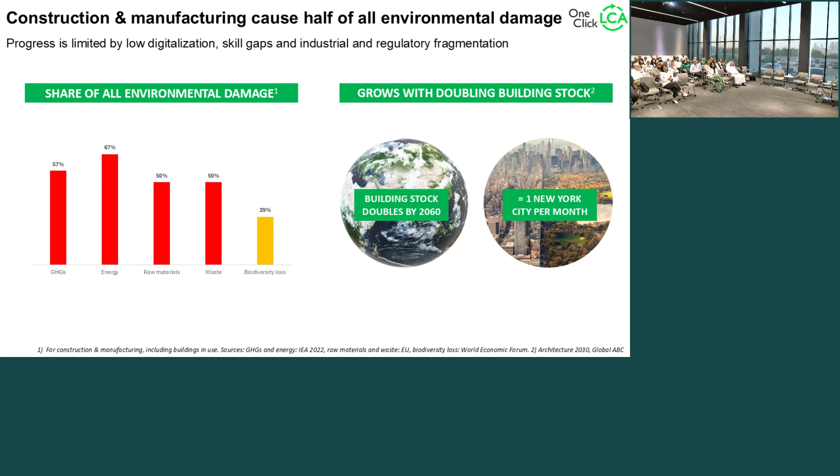One last slide. So far we are now in the era of carbon management, and that's the most crucial part of it, because we have been working quite extensively on the energy side, decarbonizing the grid. A part of it has always also been implementing reduction in embodied carbon, decarbonization, and so on. But now it's going to be the full picture as a whole moving forward, and this is what we need to really start adapting faster and in a more scalable way.

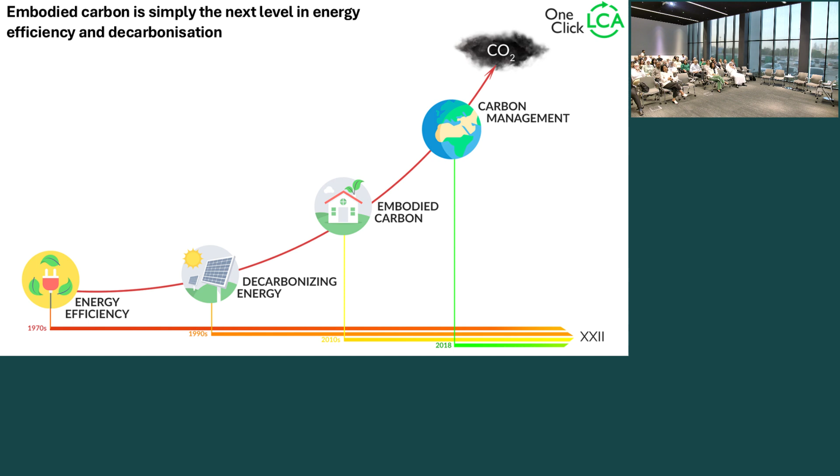So just to give a bit of background on LCA, how does that come into the picture? LCA is basically a quantitative method of assessing environmental impacts, both operational, so energy related, as well as those which are embodied, so those that come from materials. These impacts are associated with the life cycle stages, either of a building, a process, or a product. ISO is the most common basis of life cycle assessment all over the world, those are the basic standards followed.

Moving forward, you then have the EN standards, which are adapted to construction, buildings, and some to products. Some of you may have also heard of environmental product declarations, which are more further attuned to the products themselves. And then moving down the level is the national regulations or the voluntary certifications that come into the picture.

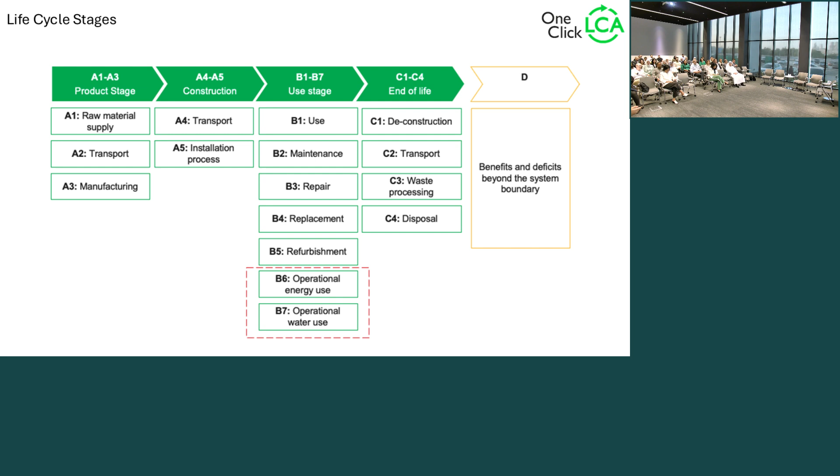So you have all the different stages covered, as you can see in the product stage on top, the construction, use, end of life, and energy is just one part of it. That is what the entire life cycle assessment is about. As I mentioned before, embodied carbon forms a part of that life cycle assessment.

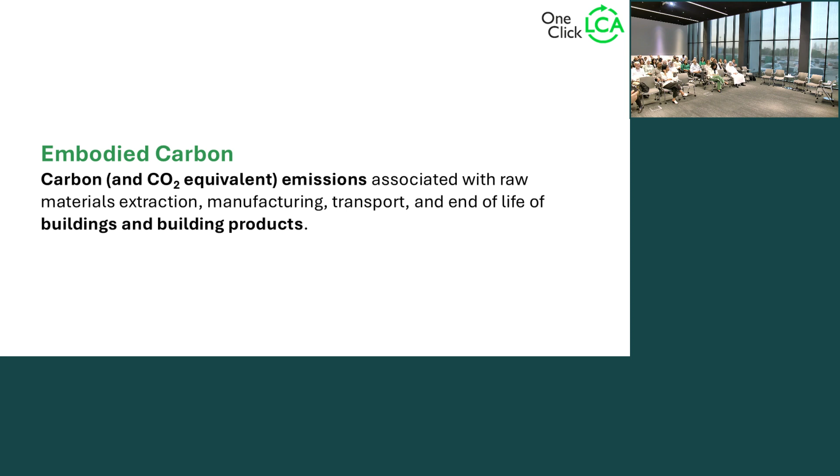This is something I thought I'll just add in here. I'm sure all of you are still aware of it, but I just thought I'll put it into perspective because these terms are used quite interchangeably, and more often so this has been the case. If you want to go again into where embodied carbon comes from, which is one of the main things I will also look at, it would be all these stages again, as we saw before.

So if you sum it up as a full picture now, you can see that for understanding the environmental impact of a building, what is most important is, of course, your quantity of materials, your bill of materials as it's referred to, and then the environmental impact of each material, each process, which is what would make up the total environmental impact of a building. That's how you would basically look at it in very simple terms.

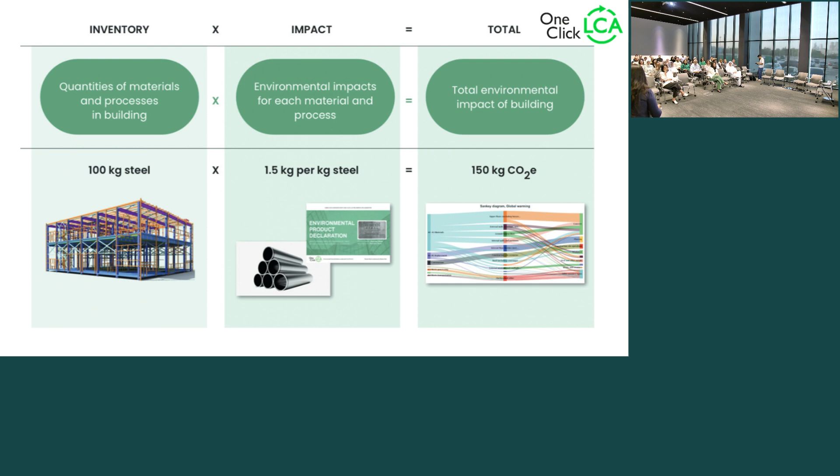So we've covered all the LCA aspects of it, but what exactly are the applications of LCA? We really need to understand what LCA would be used for in construction. It's quite widely used and it's becoming more and more mandatory moving forward. As you probably already know, certification schemes are one of the primary drivers of LCA. However, a lot of companies are also now moving towards making design choices based on an initial LCA done, or an initial assessment done. This also helps to communicate transparency and understanding.

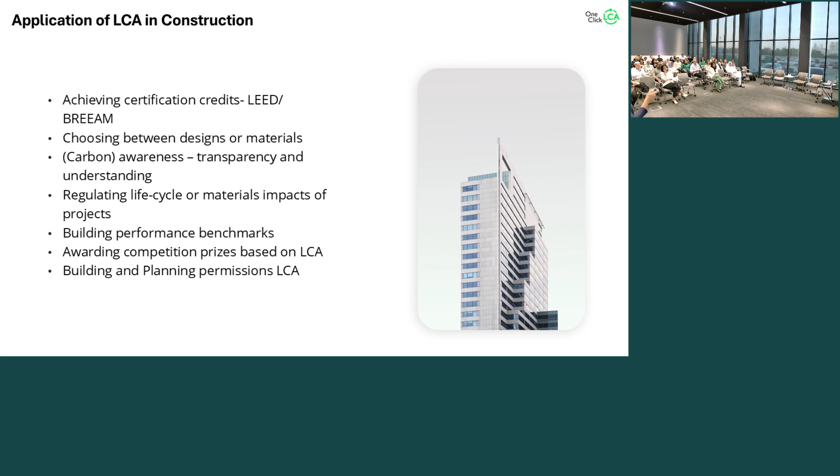And the different parts of regulation of the life cycle or the material impacts, building performance, and other things, I'll try to give a few examples of each as much as I can. But I don't want to cover a lot because this is also something the next speaker will speak about. So a very simple slide that encompasses where LCA is used and being adopted widely.

Not surprisingly, in regulations moving forward, quite more often, to give you a global perspective, EU, USA, and recently also South Africa for certain products, have made it mandatory to do an LCA. Then again, not surprisingly, one of the drivers is certification schemes. And the last one, which is increasing highly moving on, would be buyer requirements. This is something that is going to be asked more and more in tenders, and in any kind of request for proposals that you would face moving forward.

So it's essentially important to just understand what it is. A short example again, you can see the difference in the different regions of certification, regulation, and standards.

This is something we've also published in a document we put out called the Embodied Carbon Review. It's available online if you want to go look at it. But as you can see, international standards are one of the most important drivers, as well as certification-driven factors.

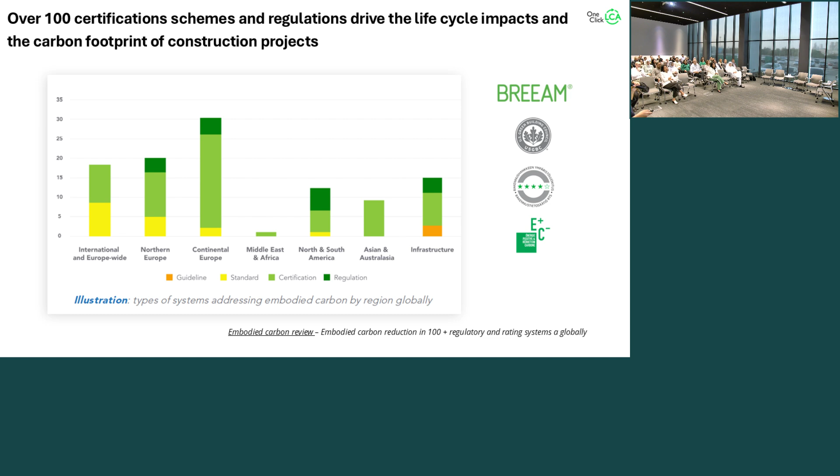Some examples of that, of how companies have been using certifications as a means of getting LCAs from around the world, how they use it, as you can see over here.

So how to use an LCA? It's quite simple, really. Basically, understanding it, assessing it, what you need to do, comparing it, and optimizing it in order to find hotspots and reduction opportunities. That's if I have to really simplify the whole essence of LCA and the need for it to be done.

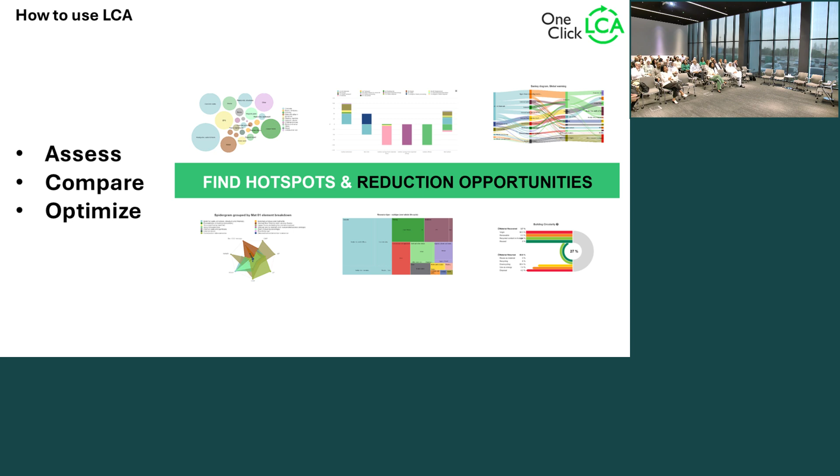One example I'll give over here would be how building typology actually impacts carbon. This is also from a real life project case. So you can see type, shape, and size are quite essential, and they impact quite a lot the choice of materials, the carbon driver, what type of materials you choose, what you're going to do with that requirement, and how much the carbon impact would be as a whole.

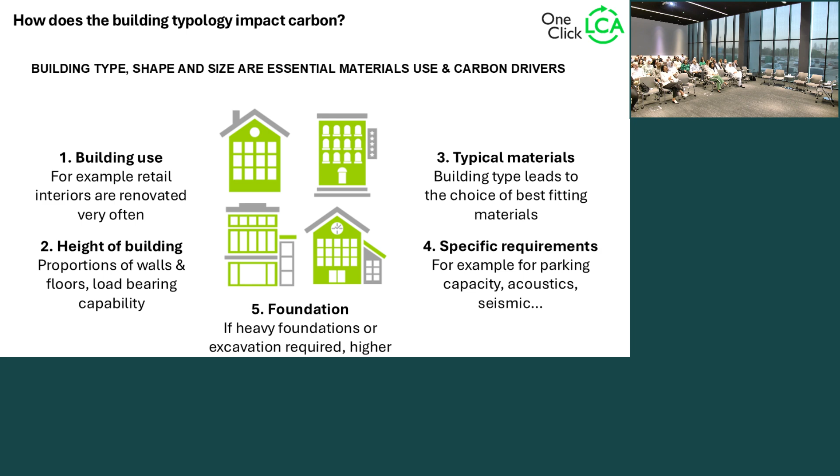So one small example of how it works. And then if you actually look at it more on a visual scale, you can see the per meter square of embodied carbon varies between the different types of buildings I just showed you.

So the construction materials will cause the highest amount of embodied carbon moving forward, for educational buildings, and then successively for others that you see over here. So it's really important how you build, with what you build, and the choices that you make, really, assuming that you have a uniform renovation cycles.

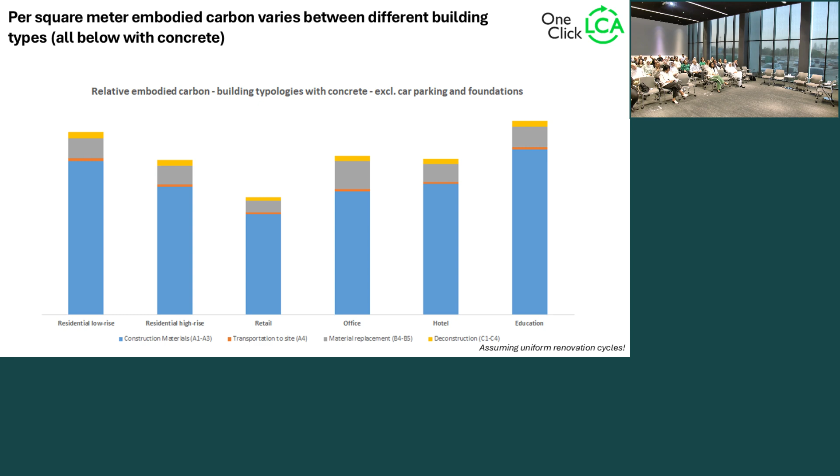Another one of the life cycle impacts and choices is for refurbishments. So here, for example, you can actually see when you have built a building, of course steel and concrete are going to play the biggest role. But when you do have refurbishments at certain timescales, you can also see how much building systems are going to impact that more, on top of steel and concrete moving forward. So this is something you can actually use the software for in order to make these comparisons.

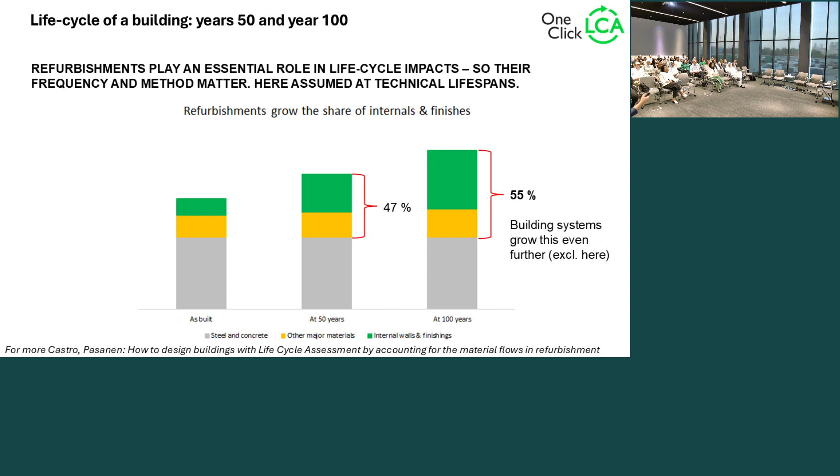Last but not least, one of the other things you can also think of in terms of LCA is putting it even beyond design. So making EPD specifications for lower carbon materials and products. That's one of the main things being asked for more and more, that most likely all manufacturers right now across GCC or even Europe or other countries are being required to submit. Assessing your designs, sharing different benchmarking databases.

One of the ones I can also mention over here is Schneider Electric, which has provided us with their huge list of data in order to make it available for every other user of the software. And of course, to share the low impact design strategies. One example of projects making it mandatory for manufacturers to submit the carbon reduction or the transparency of a product in the form of an EPD.

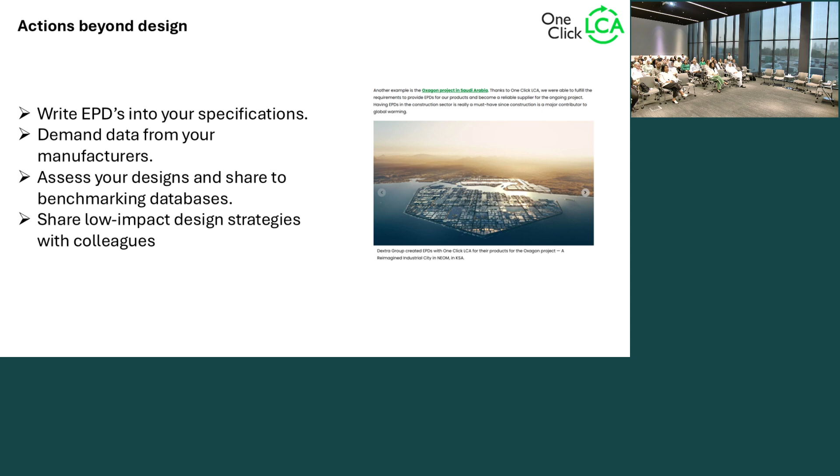So I'll just summarize it quite shortly with what OneClick LCA is. We provide an LCA software for the construction and manufacturing sector. We work quite extensively in the buildings, infrastructure, and manufacturing segment as a whole.

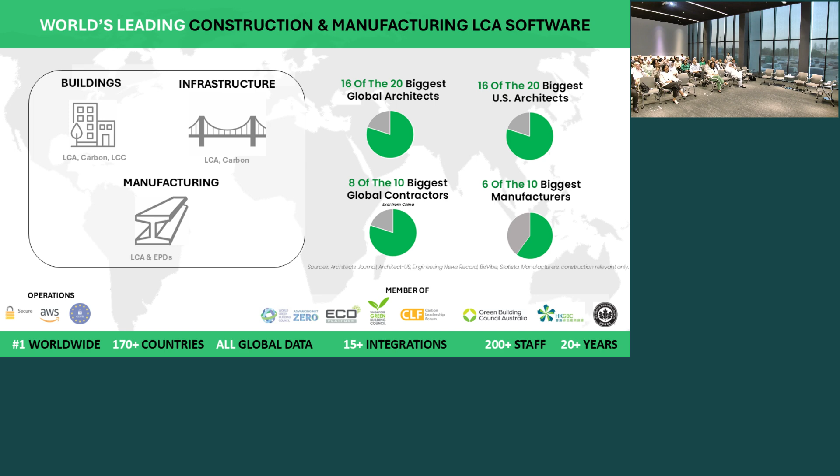We are members of different green building councils, working quite strongly with them to help raise awareness on life cycle assessment, whether it's on a building, infrastructure, or a project. What would be useful for the construction industry is to work with the software from pre-design to as-built phase, because this has the maximum impact, that you can actually drive LCA adoption within the company itself.

Compliancy, of course, is one of them, and the second would be the global database, so you have access to these databases in order to help do this assessment. It wasn't probably possible so much 6 or 7 years back, but now it is.

And as I mentioned, you can use the software from strategy to construction, even to refurbishment, as well as to reporting. So it's not just a means of reporting, it's a means of also understanding what you can do from the beginning.

One important aspect that might be useful along with the building design is looking at climate resiliency in the form of a microclimate solution. ENVI-met is one such tool that can help understand the impact the climate will have on humans, livestock, plants, nature, everything around us, as well as help understand how we can reduce these heat islands that are being created due to so much construction going on.

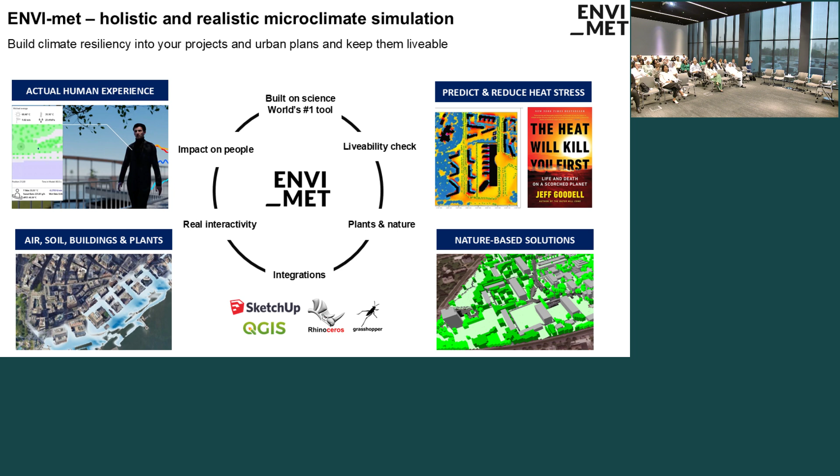Last but not the least, how you can get your data. It's not required that you manually fill in everything. It's quite simple to use, very easy to send the data from any tool that you use, even if it's simply an Excel file, to OneClick LCA in order to generate your calculation results.

Data, tools, compliance at your disposal, whichever one you may need, whether it's LEED v5, which is currently released, or the older versions, doesn't really matter. Some of the companies that have also been using it quite extensively in the GCC, for example, Khatib & Alami, Turner. You can also look at these few companies that are in the GCC area.

So yeah, that's it from me, and that's a bit about life cycle assessment and its role.

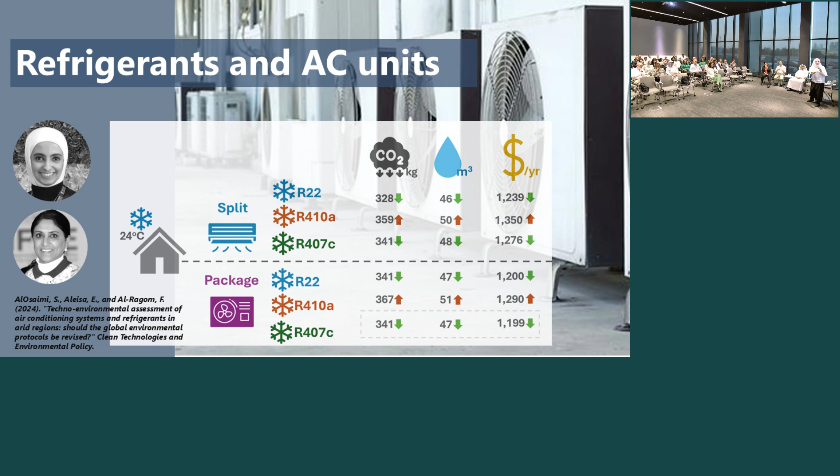We have worked together on AC systems and refrigerants, and by investigating the life cycle assessments, going through the entire life cycle, this research has been published. We were challenging the protocols.

We found that the Montreal and Kyoto protocols would focus on the production rather than the use phase. And actually, they were focusing on ozone depletion, which has a very smaller impact on the normalized scale when it comes to global warming. So we were challenging the international protocols while using LCA, and we found that the substance that's legal or authorized to be used in Kuwait is actually the worst when it comes to global warming.

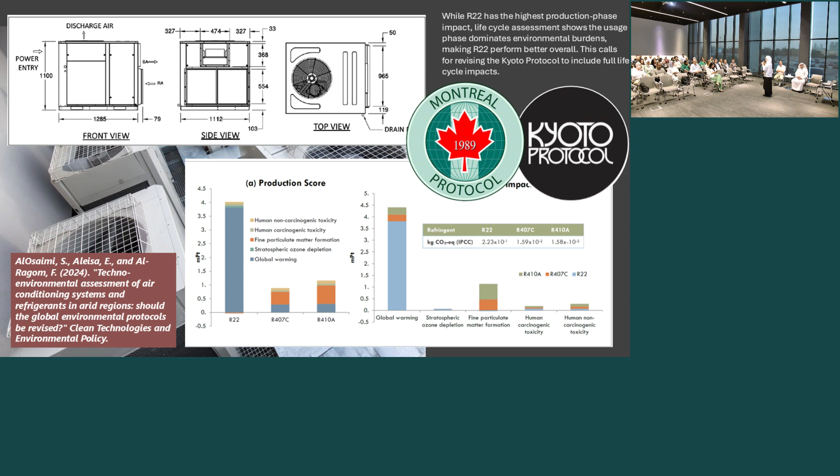And the adverse impact on ozone depletion is not that big.

This is another project that was also published last week, done by a group of undergrads. They were investigating the use of solar panels on Sabah Al-Ahmad City, and they investigated the entire life cycle, even measuring the cable length, the inverters, and everything needed. They found some difficulties related to something called the duck curve, where problems could arise when the electricity is on grid, and they suggested solutions for that. They also calculated losses.

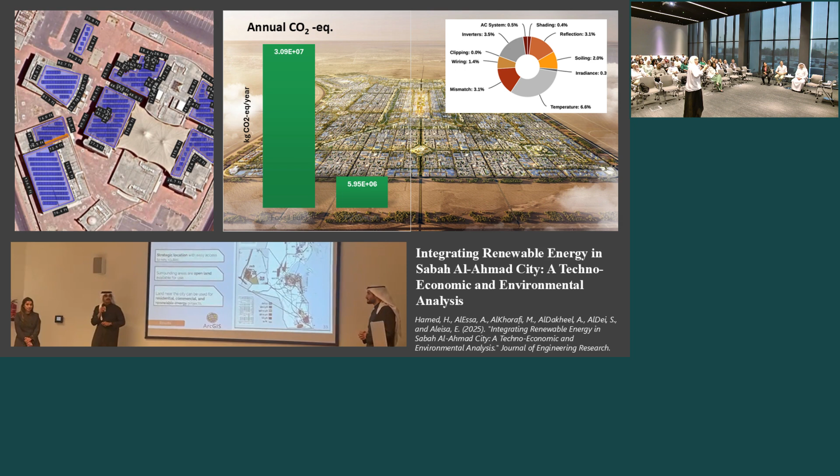This project is interesting. This is Rawan al-Sammar, a master's student who has graduated. Rawan has a family business of building fiberglass prefabricated modular structures, and she was interested in investigating the life cycle of it, especially since we use it a lot in the oil sector and in construction. Unfortunately, we found that it's not that good for the environment. So they built an entire bill of material model, and then investigated throughout the life cycle of the building.

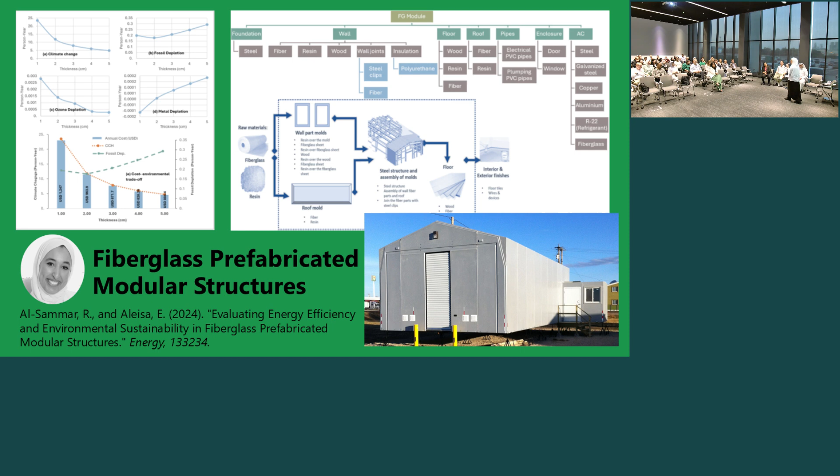Moving to the transportation sector, this is Dalal Ramadan, also a student of ours who joined MIT and graduated with honors. Dalal was interested in investigating the LCA of electrical vehicles. She found some challenges when it comes to the social aspects of LCA, in the batteries, and the heat that comes from the streets and its impacts. Her research is also published, you can check it over there.

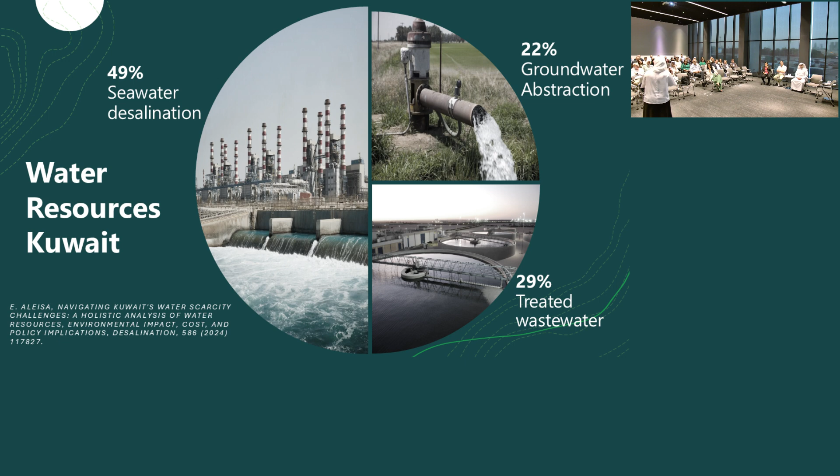Water resources is a major part of our lab. We have worked tremendously on desalination and power cogeneration, the LCA of it. We have also worked on treated wastewater, and currently my student here is going to work, inshallah, on groundwater resources in Kuwait. We use these outcomes in UNESCO annual water reports, submitting data to UNESCO from the LCA reports we create in the lab. So we have Dr. Khawla Alshayji who works with us a lot. We have published many journal papers on cogeneration, and investigated the impact of the energy mix

and the trade-offs when we switch from natural gas to crude oils, regarding efficiency and type of pollutants. This is Sarah Al-Haddad, who works at KISR, at the wastewater center. Together we published a paper comparing types of seawater desalination with types of wastewater treatment. An interesting finding was that although Kuwait is promoting RO, we found that RO wastewater needs water to produce water. So every cubic meter of water we need to clean with RO from wastewater, we would use almost double the amount. We need water to clean water, which is a problem. So we were advocating actually using tertiary wastewater to increase this amount, because the water footprint is much less.

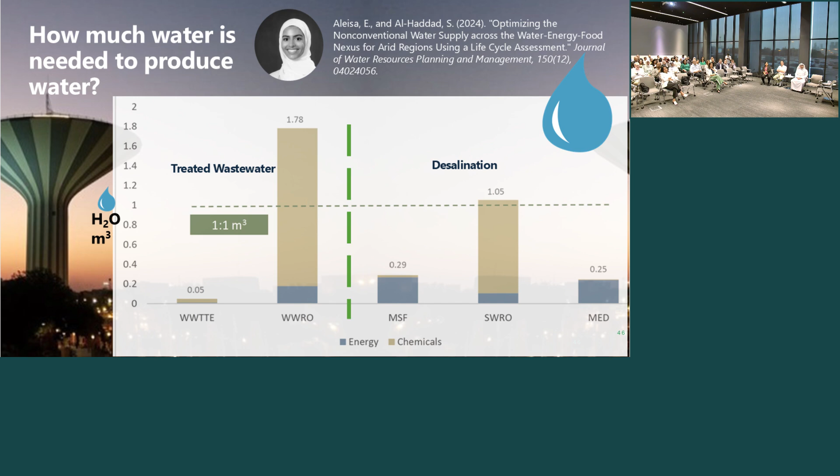And if we're going to produce clean wastewater with RO, this water should only be used for injecting depleting aquifers, which are depleting in a very bad manner in Kuwait. Otherwise, we should only use this. And when it comes to desalination, we should use MED. This work has also been published, by Asma Alrashidi. She won first prize in research, and this was on electrodialysis desalination, a form of desalination, and through life cycle assessment we investigated the chemicals, the energy, and increasing water production.

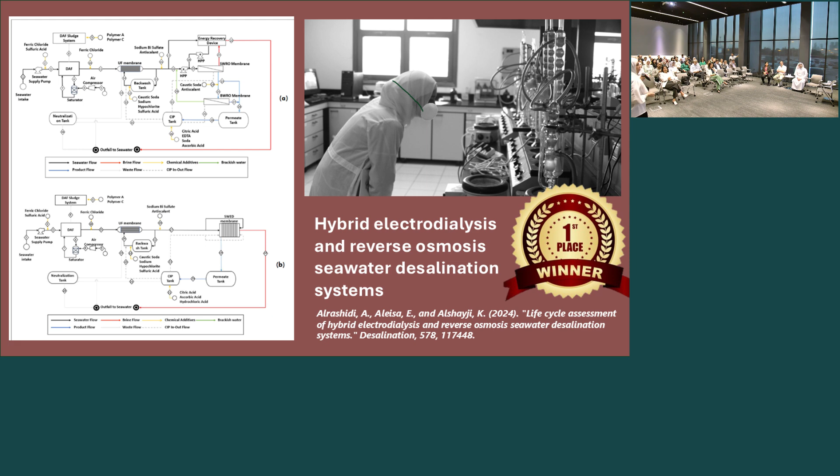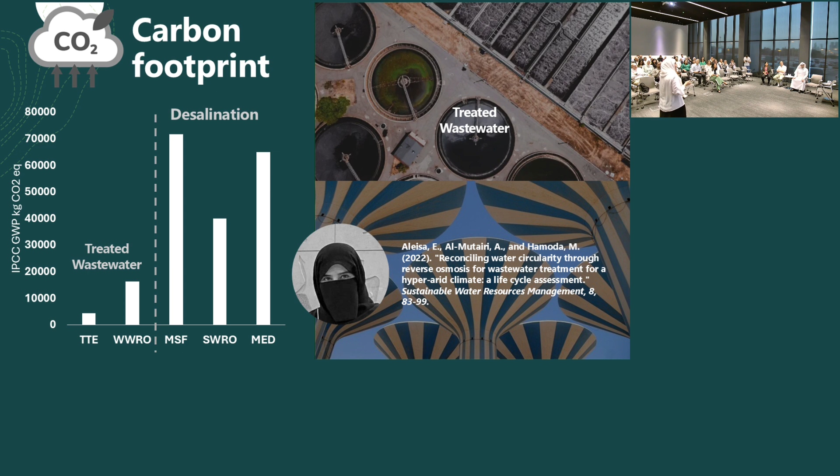This is Asma. She has also won first place for research. She investigated RO wastewater and compared it to all three methods. So Sarah's research builds on Asma's research. She analyzed the Sulaibiya wastewater plant, and estimated exactly the impact of chemicals that we needed. Worldwide, they were promoting RO desalination because it requires less energy, but on the other hand, it consumes much more chemicals than MED and MSF, especially ferric chloride in the preliminary stages. So this was the hotspot for the environmental impact.

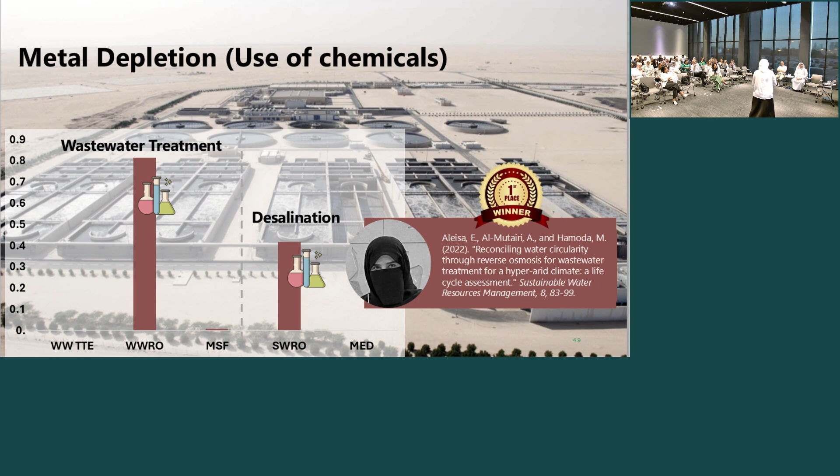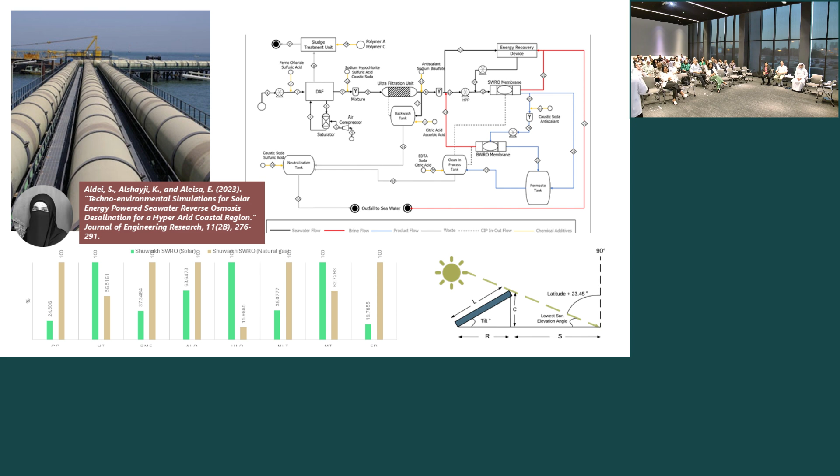I don't think, through the research, that it's feasible. Solar power is good, but not for this application.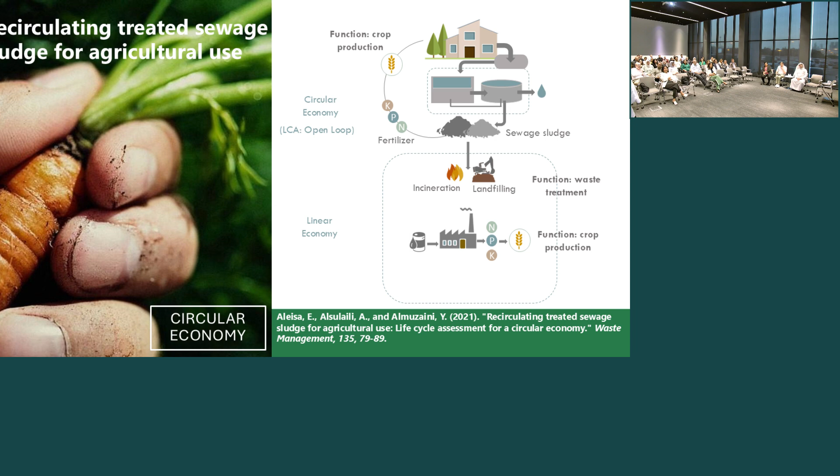This research has focused on circular economy by Yasmin Almuzaini and Dr. Abdurrahman Alsulaili. Together with the lab, we have investigated the use of sewage sludge and then using it to extract nitrogen, and it was really, really feasible.

This study was also done, an LCA study with Dr. Rawa Al-Jarallah from the Department of Civil Engineering, where she analyzed 600 garbage trucks, through a study that combines ASTM standards with ISO protocol and other protocols associated with the subject matter. Using this characterization, we have within the lab investigated over 70 protocols on how to treat or deal with municipal solid waste in Kuwait.

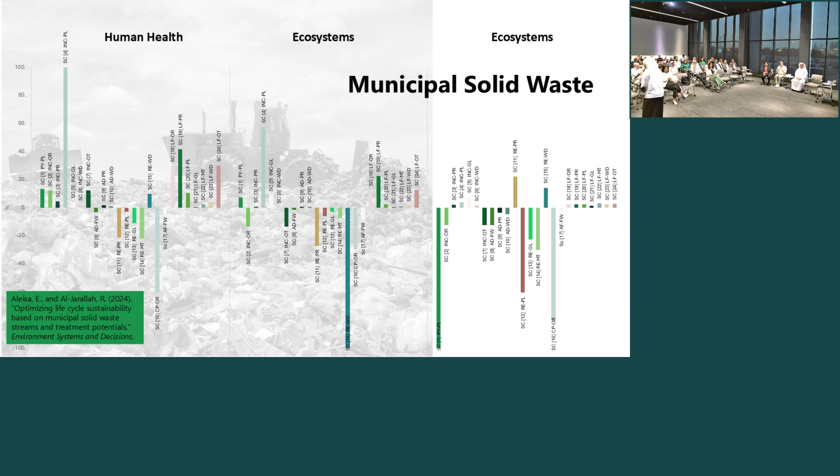We found that although recycling has been advertised a lot, it might not be the best option compared to composting and animal feed. The first option is donating to the poor if you have near expiry date foods, then animal feed, then composting. So recycling was not the first one, except when it comes to metals.

This study was also published and was conducted by Shreefa. Sharifa works at Kuwait General Mills, and she investigated the use of near expiry date bread to be used for animal feed, and she has implemented her project. She compared the use of this bread as compost, fertilizer, or animal feed, and found a tremendous impact. This project has gone into practice since Sharifa already works at Kuwait General Mills, and mashallah, this is an excellent project.

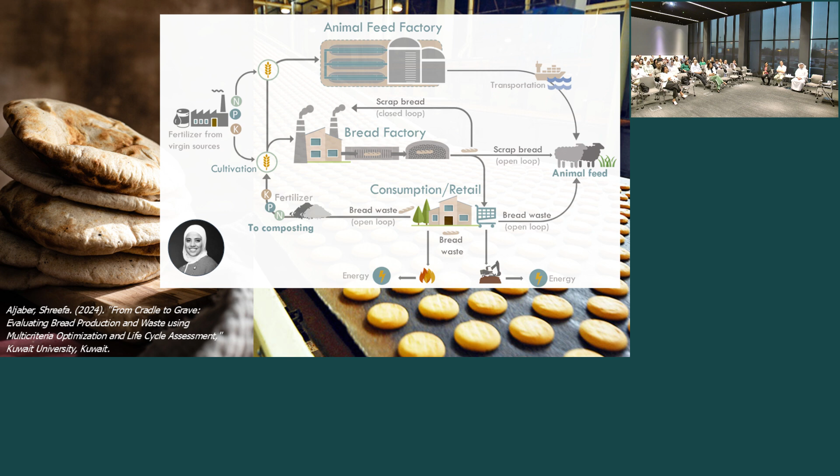I wish it could be also implemented in other regions as well.

This is her research, because it's Eid al-Adha now, right? So we need to have sheep. The Eid is coming. Within her study, these were the stages that she covered compared to literature.

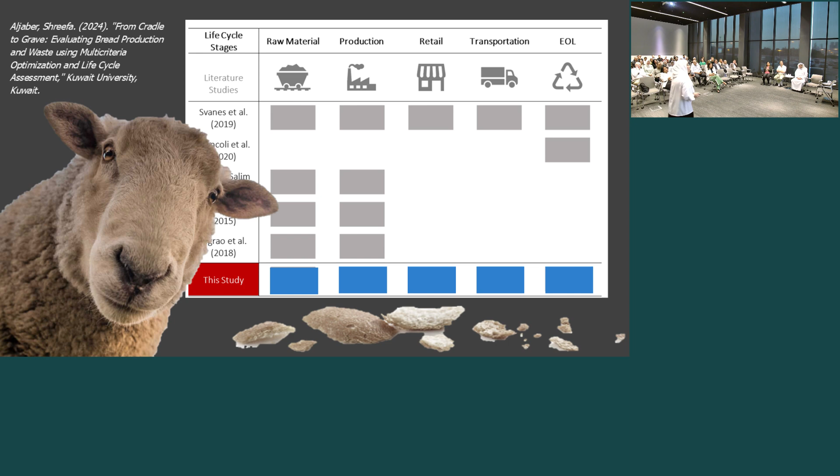This is the work of Ala. Ala also published two journal papers when it comes to converting food waste into animal feed. Ala is currently working now in KFAS, and she also participated in a committee with the Ministry of Commerce to push this idea.

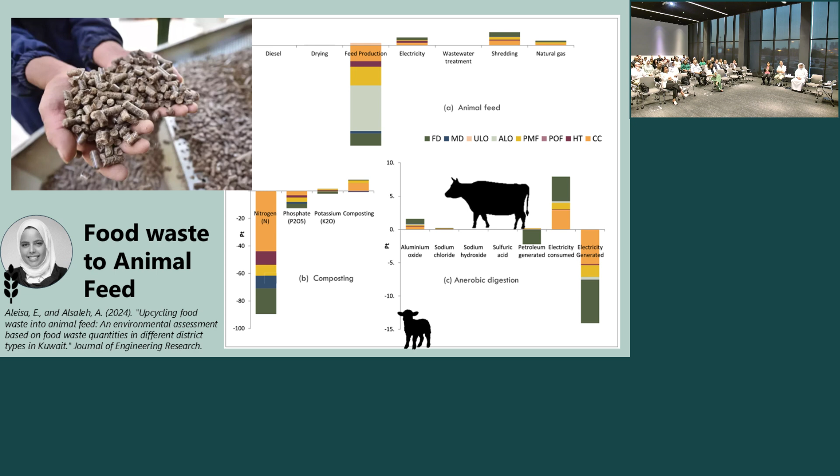It's a good idea for certain foods, to produce animal feed. Currently we have a student, she's not here - some of the students have already worked on this project.

This project has been conducted in collaboration with Ni'mati, and there is Kuwait Food Bank who takes the food. Munira is here working on this project. So every day, on average, the meals from 150 airplanes now go to Ni'mati.

We have also worked on other projects where we take food from weddings at 3 a.m. in the morning and redistribute it to the poor. Currently there are 60,000 beneficiaries of that project on a daily basis. I was even supervising this until last night. The environmental impact, plus of course the social impact, is huge because all of it is good food and has been delivered just in time.

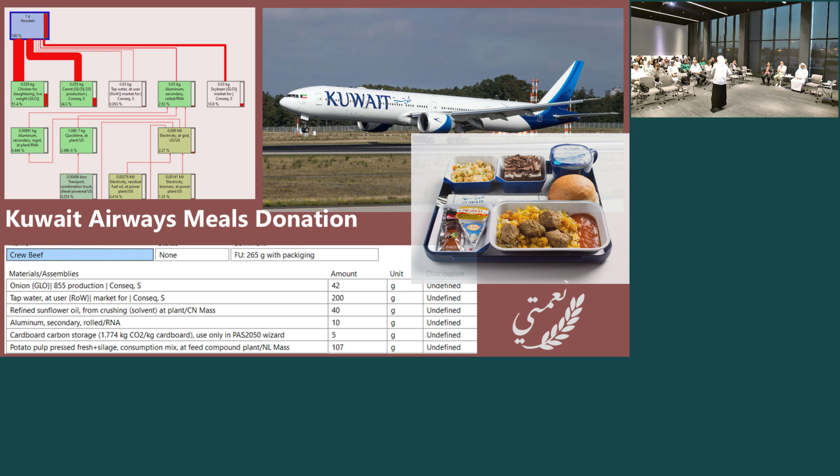There are other projects that have to do with embodied energy and green roofs that have not yet been published, but the ones that you see are published, except for the Kuwait Airways one, which inshallah is going to be finished soon. Thank you so much for listening.

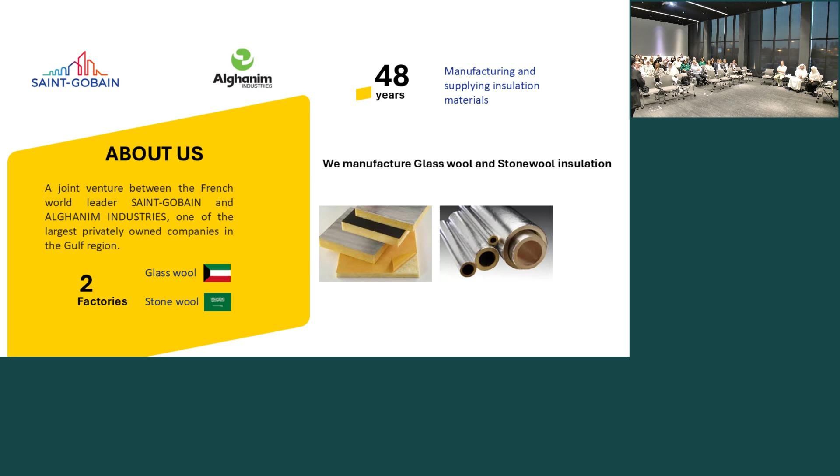As you all know, Alghanim is one of the largest privately owned companies in the Gulf region, and Saint-Gobain is the French leader. So we are a JV between Alghanim and Saint-Gobain, and we've got 2 manufacturing units. We have our glass wool manufacturing based out of Kuwait at Shuaiba, and we have our stone wool plant at Yanbu in KSA.

So we manufacture glass wool and stone wool range of products which cater to various applications, and these products have properties like acoustics, thermal, fire safety and sustainability - covering the recycled content, because we have pretty much recycled products which are used during our manufacturing process.

When we talk about the application of our products, we cater to 3 segments in detail, starting from industry, which covers the high temperature applications - for example oil and gas, refineries, power plants, where all the high temperature applications will be applied. We have our stone wool range of products which cater to this requirement.

Then going on to the building, where we cover the building interiors as well as the building exteriors - all this will come under the building application. And then the HVAC covers all the ducting applications. We manufacture the duct wraps, duct liners, pre-insulated ducts, and pipe insulation which goes for the hot or chilled water pipelines.

Now, carbon neutrality is at the heart of KIMMCO-ISOVER for a long time. So we strive at achieving 0 emissions by 2050 through the net zero carbon campaign, which we launched in 2019 as a part of Saint-Gobain. What is this? Our goal is very simple: we must not emit more carbon than what we absorb. So we must be carbon neutral.

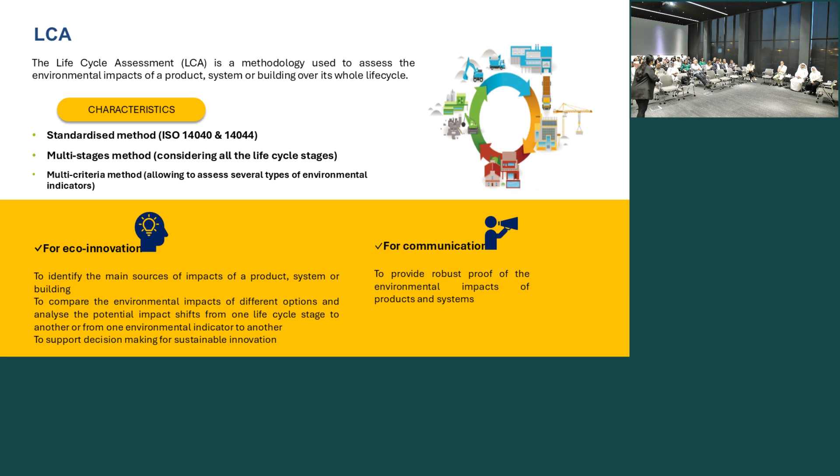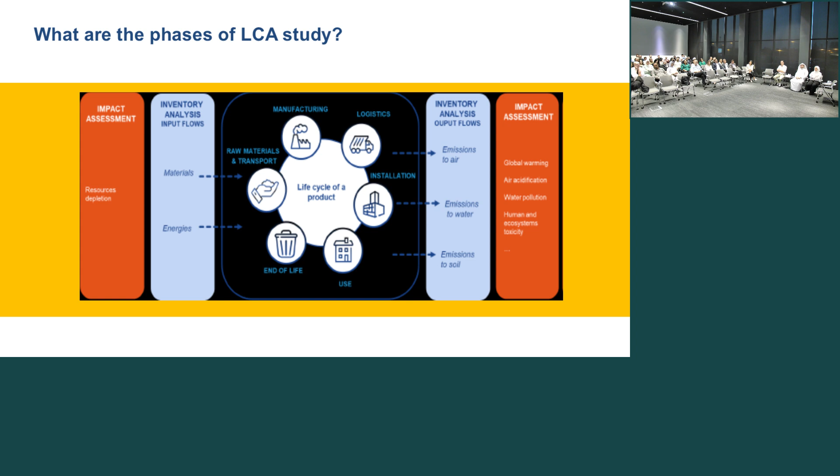And then when you talk about the output flows, it comes in terms of emissions to air, to water, and the soil. So you all know about global warming, right? The temperature of the earth has risen by a few degrees every decade. Say, for example, 1 to 2 degrees is what we notice. And that is where a lot of changes are happening on this earth. So there are a lot of disadvantages. You would have heard about greenhouse gas emissions. So all this is related to carbon dioxide emissions.

So why is LCA important for manufacturers? When we talk about environmental impact reduction, it identifies the areas to reduce energy, material waste, emissions, and footprints. And also, we can optimize the process to minimize the environmental impact.

In terms of regulatory compliance, this is mandatory now in some countries, emerging countries, where regulations are being framed and we'll have to comply with this. So some of our products require EPDs for submission based on the projects.

And then the market demand for sustainability. Nowadays customers prefer eco-friendly products, driving demand for sustainable options. As we all know, customers are now aware of sustainability, LEED certifications, LEED points. So all these are being asked by customers nowadays.

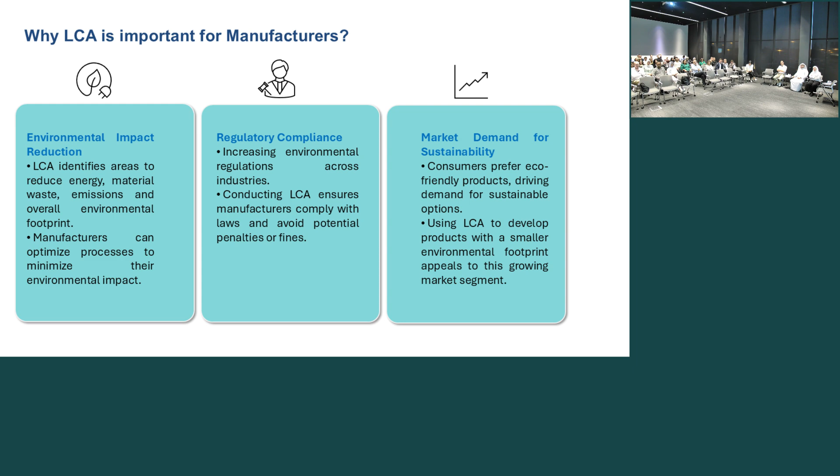Cost savings for sure, because it identifies inefficiencies in material and energy use. So thereby we reduce the cost, optimizing the process and reducing waste to have some long-term benefits as well in terms of cost savings.

Then product innovations. This also encourages us to come up with innovative and improved product designs. And then competitive advantage, because customers will always opt for a sustainable product. So this gives us a competitive edge as well.

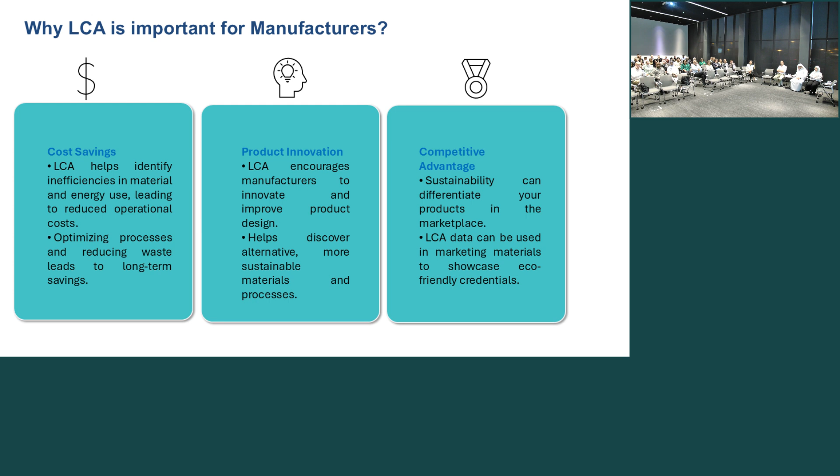Talking about supply chain optimization, yes, we also work with our suppliers to optimize or reduce the carbon dioxide footprints, to have less carbon dioxide emissions. Then comes risk management and stakeholder management, which I'm not explaining in detail, as we all know.

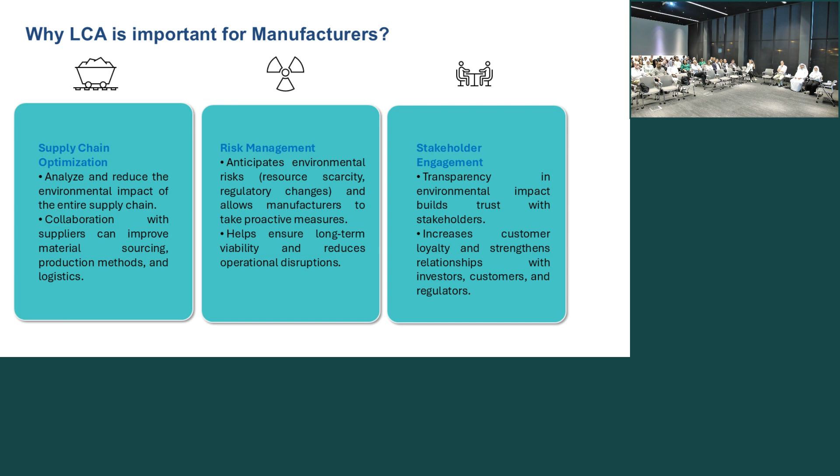So this is data collected as of March 2025. And here I come to the end of the presentation. Thank you so much.

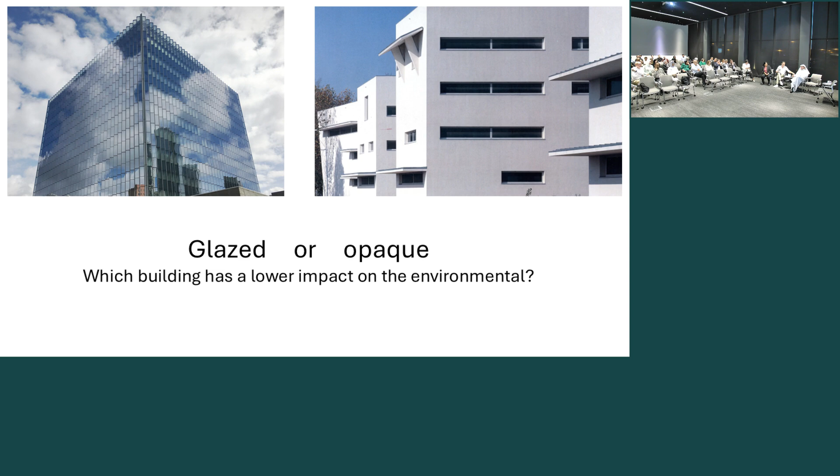These tools allow us to move beyond general assumptions and rules of thumb. They consider a wide range of variables, from material sourcing to thermal performance and end-of-life scenarios. As a result, the environmental assessment of buildings has become a detailed process that requires data-driven analysis rather than relying on intuition or speculation.

By 2060, the world is projected to add 230 billion square meters of buildings' gross floor area. This is almost equivalent to adding an entire New York City to the planet every 34 days from now until 2060.

Buildings account for 39% of global carbon emissions, out of which 28% is from buildings operation, hence the name operational carbon, and 11% from construction of new buildings and renovation of existing buildings, known as embodied carbon.

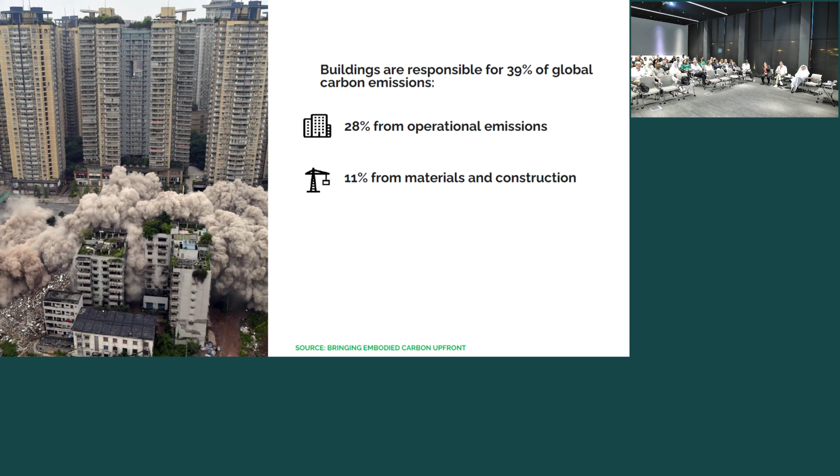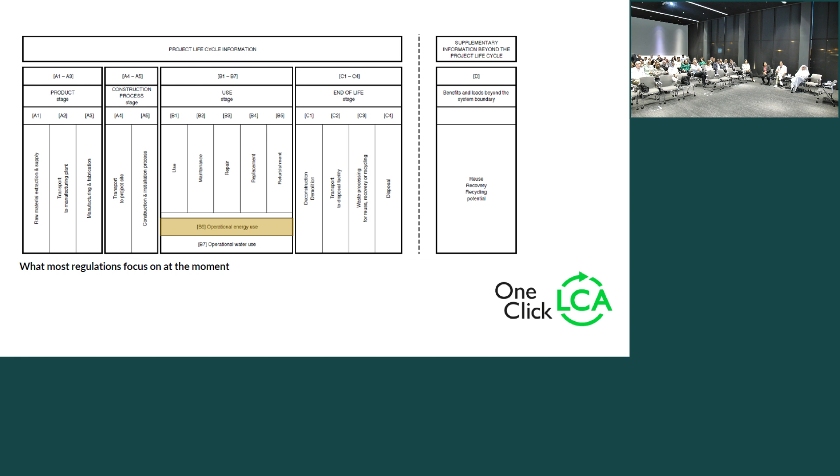This is what life cycle assessment is. It is understanding the complete picture of a building's lifespan, from raw material extraction and manufacture, as seen in the product stage, to the building construction and products installation stage, to the operation and end-of-life stage, and even post-life impacts such as reuse and recycling.

So, if a building is classified as net zero energy, which is the best possible scenario according to our understanding, meaning that it draws no energy from the electricity grid, then is it still truly sustainable? Life cycle assessment challenges us to look beyond just operational performance and consider the full environmental cost of a building from cradle to grave and even beyond.

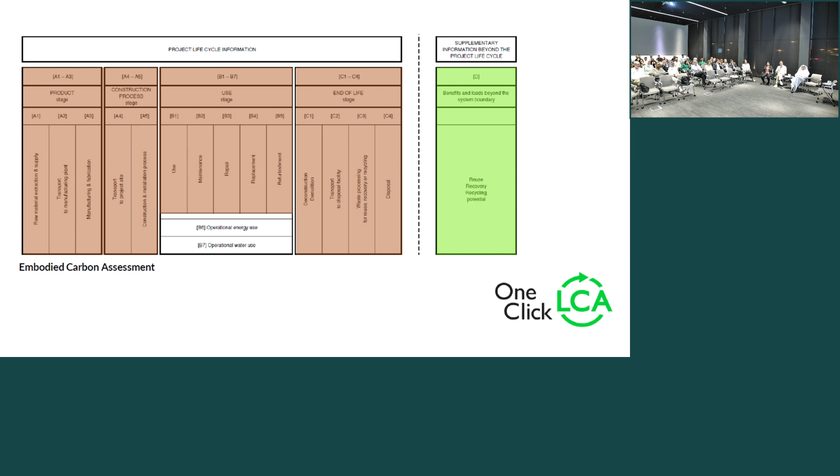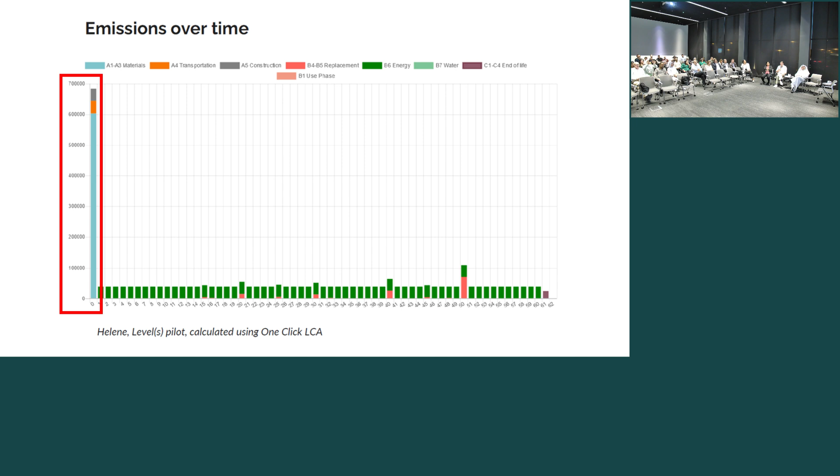After the project starts to operate from year 1, the green color, B6, becomes dominant. This is the energy use of the building over the years and the source of operational carbon. The pink color of B4 and B5 refers to the replacement and refurbishment, which happens, say, every 10 years, and is counted with embodied carbon associated with the newly installed materials.

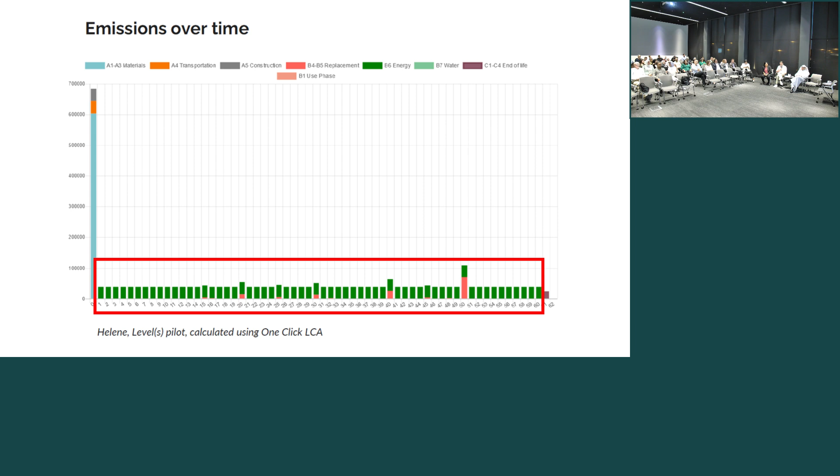As renewable energy systems, lighting technologies, and the thermal performance of building envelopes continue to improve, the operational carbon associated with energy consumption is expected to decline significantly. As a natural result, the focus is beginning to shift towards a critical but often overlooked area: embodied carbon.

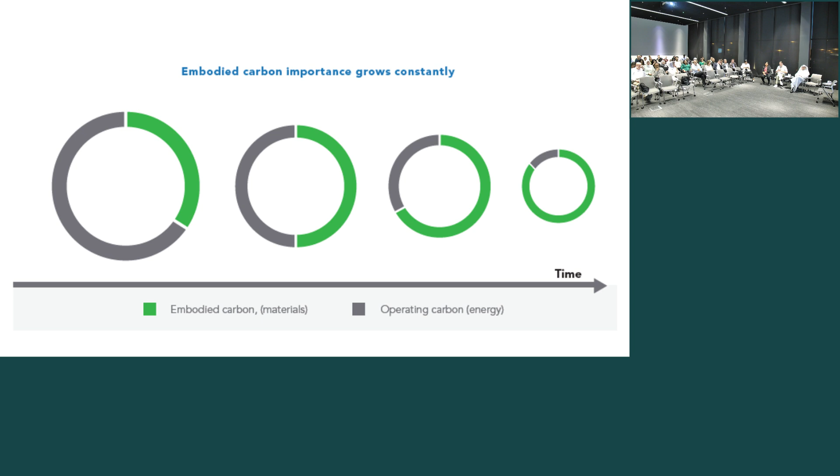How can buildings' structural, envelope, and interior spaces impact the environment? Which structural element contributes the most to a building's carbon emission?

With the help of life cycle assessment software, it's now possible to quickly compare the environmental impact of a wide range of building components. This allows designers and engineers to make more informed, sustainable choices early in the design process.

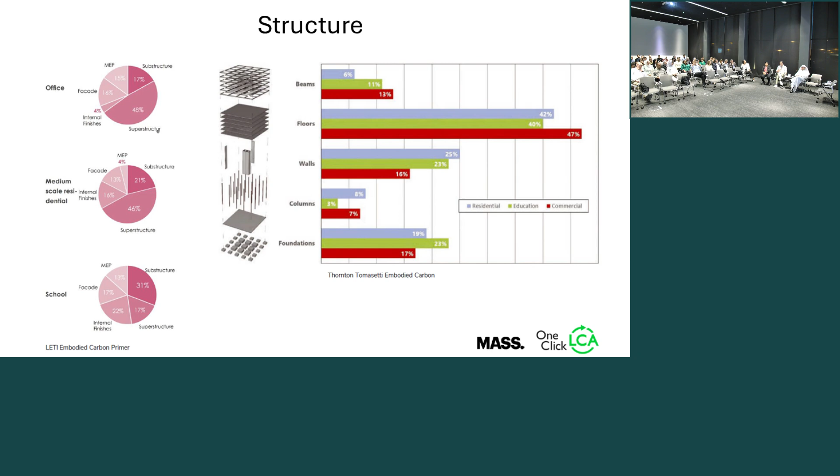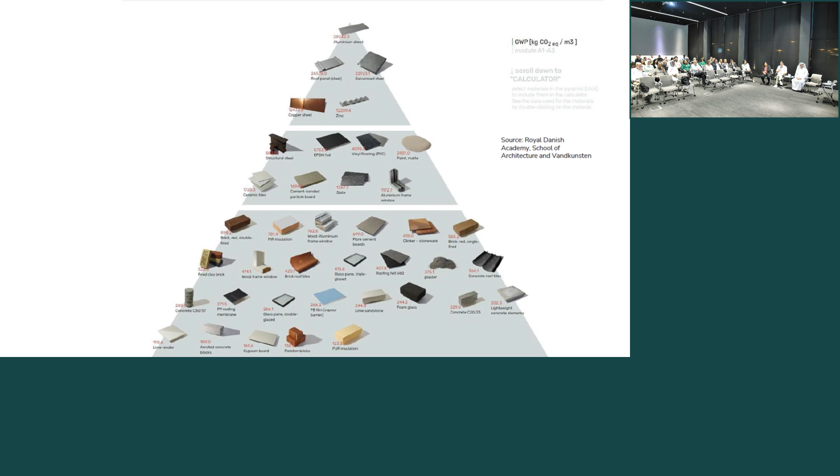At the lower part, we find materials that are more benign for the environment, like rammed earth, and at the base settle the wooden materials. So, it's better to consider materials from the bottom of the pyramid, but if we need to use materials from the top, we should use them as efficiently as possible.

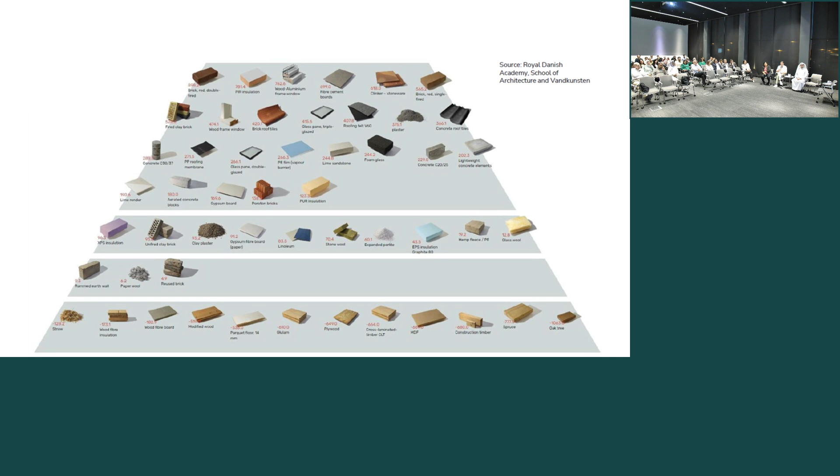It's important to adopt a system approach in this regard. That is, build less, build intelligently, and build for the future. Here's an example for each.

Build less can be achieved by replacing cast-in-place concrete slabs with hollow core or bubble deck slabs, which can significantly reduce the embodied carbon due to having less concrete volume without compromising structural integrity.

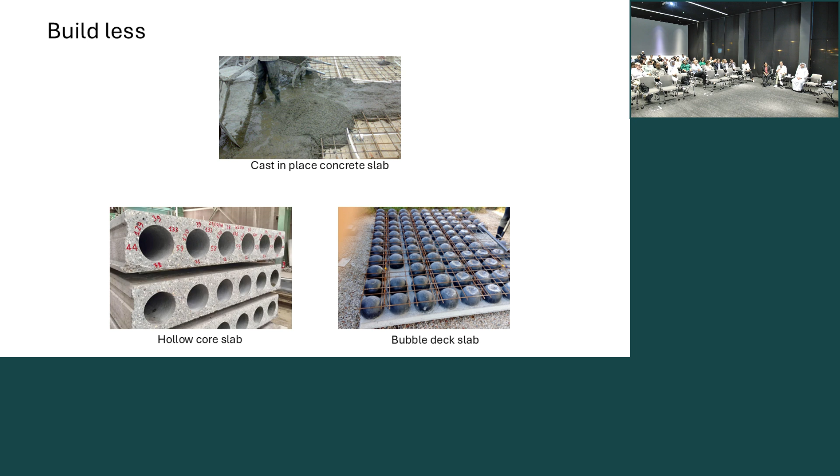We can build intelligently by using smaller grid spans between columns, which minimizes embodied carbon due to using less elements in tension, like beams and slabs.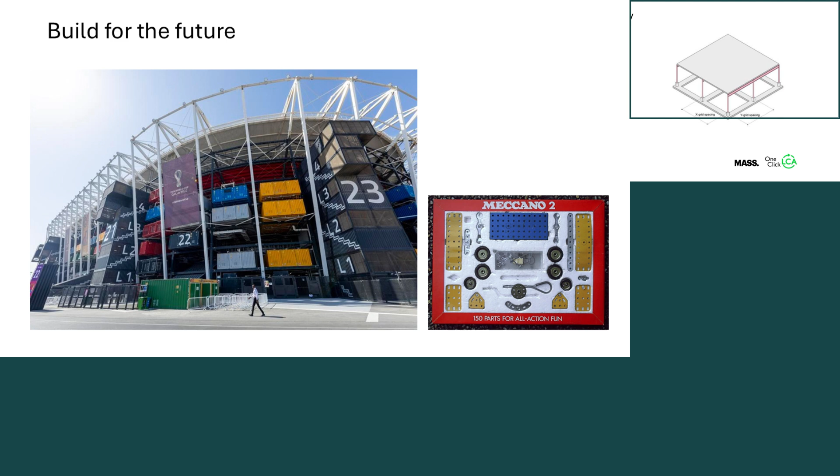Building for the future can be achieved if we consider designing for disassembly. This is the temporary Stadium 974 in Doha. It utilizes shipping containers and modular white steel structures similar to kids' Meccano toys, which can be screwed, then loosened. The stadium was planned to be disassembled, transported, and then reassembled in a future World Cup host country.

When designing a building's skin, life cycle assessment software can aid in making instant choices for materials with less environmental impact. Going back to the materials pyramid, we notice that our contemporary building skin typically uses materials from the top, including aluminium, galvanized steel, and copper.

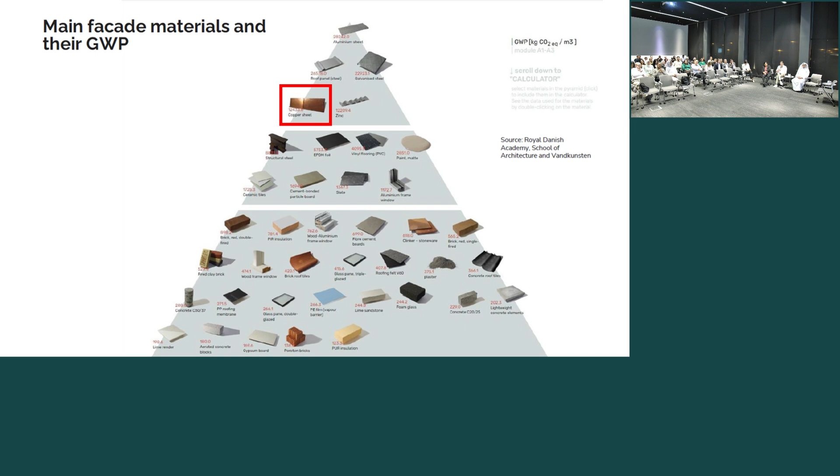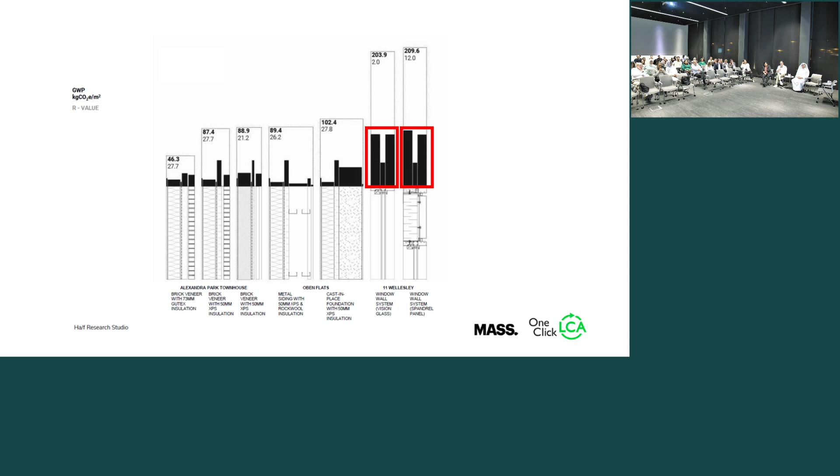And more eco-friendly materials from the bottom can make their way to taller or even mid-sized buildings. Here's a group of wall configurations with black columns on top representing embodied carbon of the components. We can notice that windows with aluminum frames incorporate the highest carbon emission. Again, we should think of a systems approach when designing building envelopes.

Building less can be best achieved by minimizing the building envelope, which not only reduces the surface area in contact with ambient temperature, thereby lowering heat gain, but also limits the amount of material required for construction.

This design was our submission for the House of the Future competition last year in Dubai. Our approach focused on making the building as compact as possible by avoiding unnecessary volumetric additions or subtractions. We displaced only two rectilinear volumes to create a front parking area and a backyard in the rear.

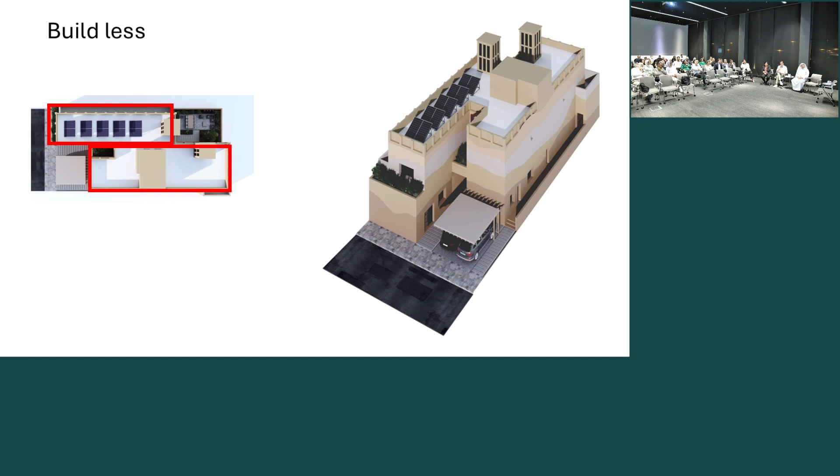Given that the wall is 36 centimeters thick, we set the windows flush with the interior surface of the envelope. This allows the wall's depth to cast shadows naturally, eliminating the need for external sunbreakers or cantilevered shades.

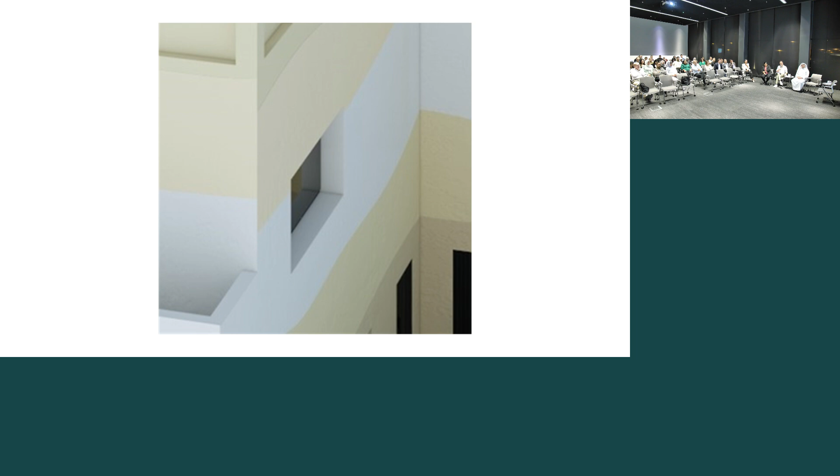This project is a good example of building intelligently. Designed by Iraqi architect Rifat Chadirji, the building's skin recesses and extrudes to preserve privacy and filter the intense yellow sunlight. Through double reflection, the envelope reduces direct heat gain and introduces cooler, whiter daylight and minimizes glare caused by the region's dusty atmosphere. It's true that more material has been incorporated into the envelope, but this is justified as long as genuine value is added beyond naive aesthetics.

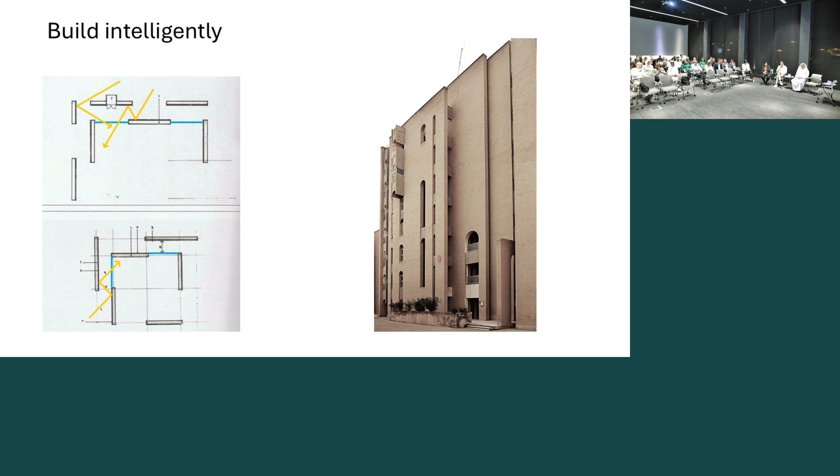We can build for the future by specifying biogenic materials which sequester carbon from the atmosphere during photosynthesis. In the same villa we submitted for the competition, we used hemp brick for the building envelope, which serves a double function, acting both as outer skin and insulation, thereby further reducing material use and improving thermal performance. At the end of the building's life, hemp brick can be recycled or combusted to generate energy.

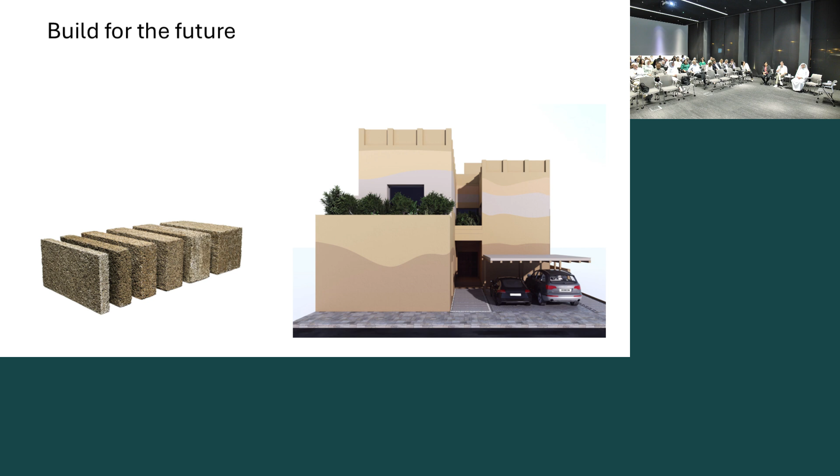Finishes are the closest elements to building occupants, and that can have the greatest impact on human health. Even if it represents a small quantity of the material in relation to the entire building, they are replaced more often, which increases the impact from the perspective of carbon emission and health.

Again, we should consider a systems approach when designing interior spaces. To build less, we can adopt a minimalist style for design which has many benefits. Beyond its visual clarity, which helps calm the mind in a world of constant information overload, minimalism also embodies an anti-consumerist ethos, which works against the gradual accumulation of new items over time.

Building less can be achieved also by eliminating paint, for example, by utilizing raw material like exposed concrete surfaces with minimum treatment.

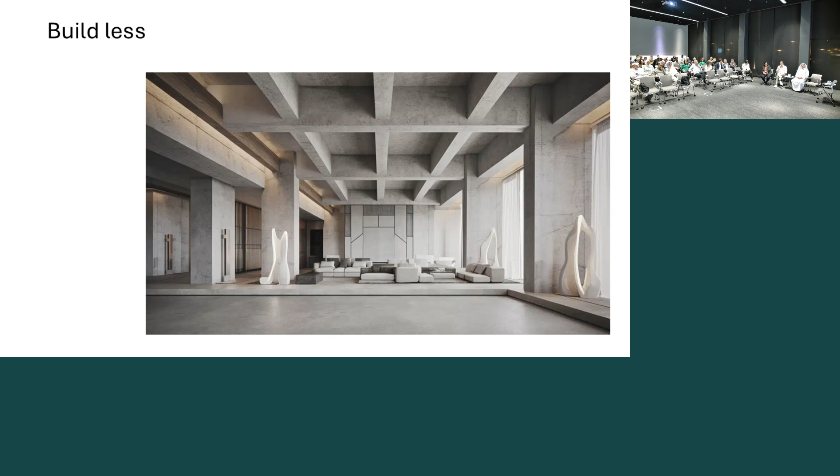We can build intelligently by thinking of what the components of the products we specify can be separated into, and at what cost. So one of the reasons why mechanical fasteners are preferred over adhesives in manufacturing is that it facilitates our ability to disassemble product components for reuse or recycling.

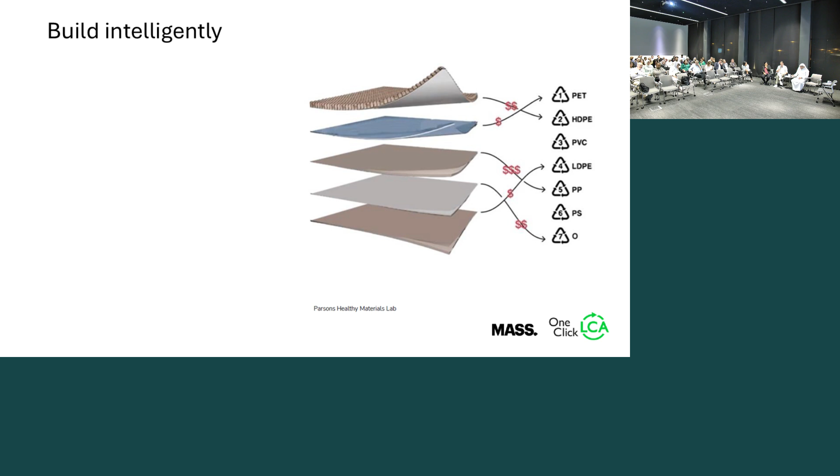One of the most effective strategies to build for the future is to design buildings for flexibility. It's important that architects consider how their buildings can be adaptively reused to accommodate new functions that are different from the original functions for which the buildings were constructed. This approach helps preserve the building's embodied carbon from stages A1 to A5 by retaining its structural framework and applying minor modifications to the envelope in order to meet updated regulations.

Strategies to increase buildings' potential to be easily repurposed in the future include designing compact buildings with modular structure and openings, and considering the use of movable partitions.

Life cycle assessment can have many scopes. Cradle to gate refers to stages from A1 to A3, usually used for products. Cradle to grave encompasses A, B, and C stages, where the building components end up in landfills.

Cradle to cradle refers to the entire life cycle assessment stages, including A, B, C, and D, where the products are reused, recycled, or converted to energy at the end of their life, and waste is not generated from this procedure.

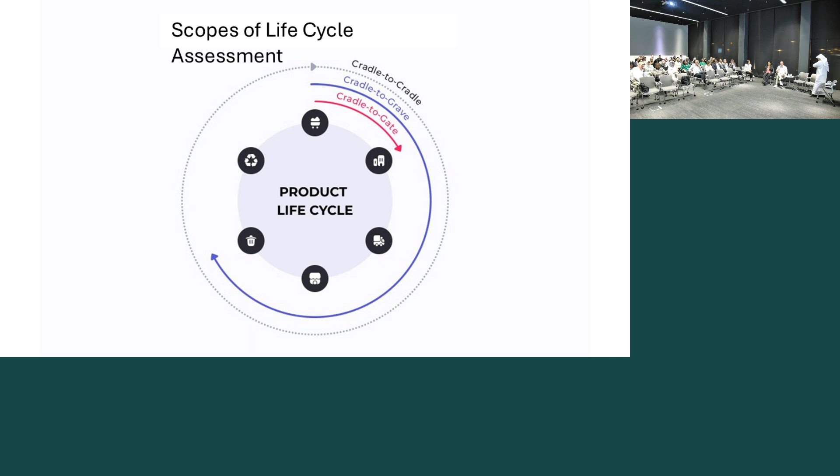Here are some general principles when conducting a life cycle assessment. LCAs should be used in design as well as for reporting. This means that life cycle assessment can help achieve sustainable design even if the project is not pursuing green building certifications.

Scope and level of detail should be appropriate for the need. For example, LEED V4 and V5 requires at least cradle-to-grave life cycle assessment for the building.

Life cycle assessment can be performed on a whole building system or material basis. The design team is best placed to perform LCA because they understand the design intricately. However, each discipline shall contribute and not rely on the architects or the external consultant to work for all other disciplines.

Doing LCA may seem difficult at first, but with experience, one can become familiar with techniques that make conducting LCA easier, faster, and more accurate, like BIM integrations, developing templates, and recording useful information such as what EPDs represent, best or average product, or the typical quantity of material in a product.

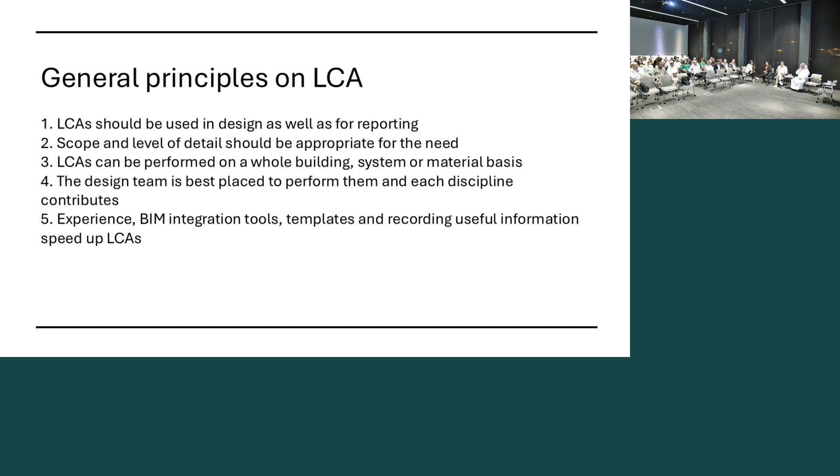At the end, I would like to conclude with the following key takeaways. Impact reduction potential is greatest when life cycle assessment is conducted at the start of the project design. Reducing environmental impact occurs at all scales, from entire buildings to products.

It's important to set environmental targets, like percentage reductions from baseline. Life cycle assessment can be used as a design tool, not just for reporting. Thank you.